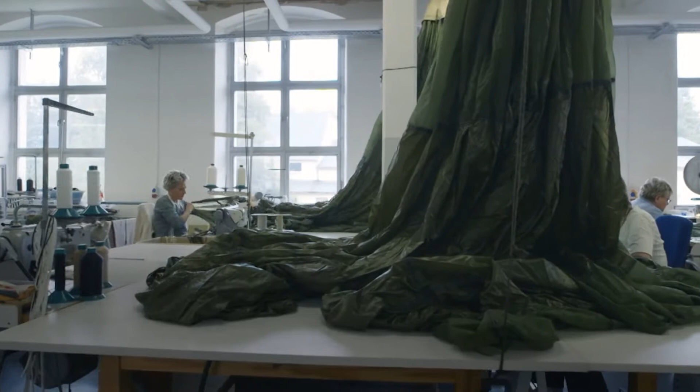Stitching these sheets of lightweight material together can create an air-resistant canopy that can drop a fighting force out of the sky and turn the tides of war.

When Leonardo da Vinci first conceived of the parachute in 1483, he may not have realized the impact it would have on warfare.

5 centuries later, the Allies launched Operation Varsity. On a single day in March 1945, 16,000 British and American infantry were dropped onto the eastern banks of the Rhine, securing strategic towns and bridges and playing a pivotal role in the Allied victory.

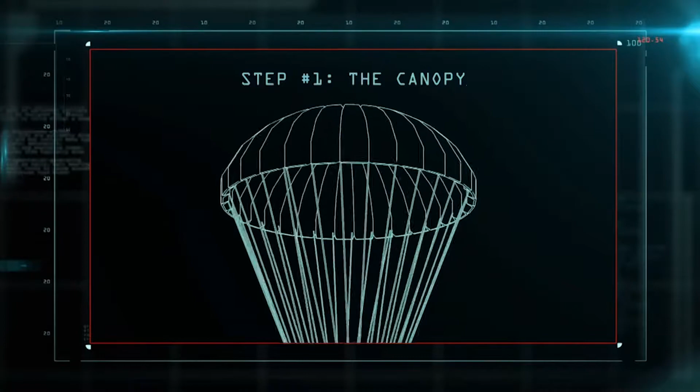The RS-2000 military parachute breaks down to the chute pack, the harness, and the canopy. It takes 90 meters of tear-resistant material to create the parachute canopy.

The idea of a parachute is simple. A canopy traps a large volume of air, creating enough resistance to dramatically reduce your terminal velocity, so you can jump out of a plane and land softly on the ground.

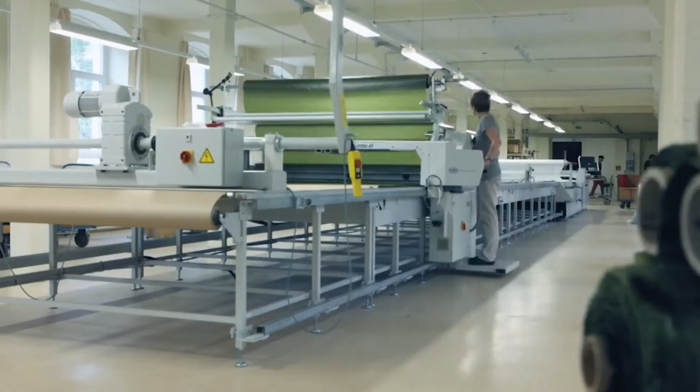But the design of a parachute is actually quite complex. The RS-2000 is made of 2 types of nylon, airtight and porous, which lets some of the air through. Hundreds of individual panels of both fabrics are laid out, measured, and machine cut on a diagonal.

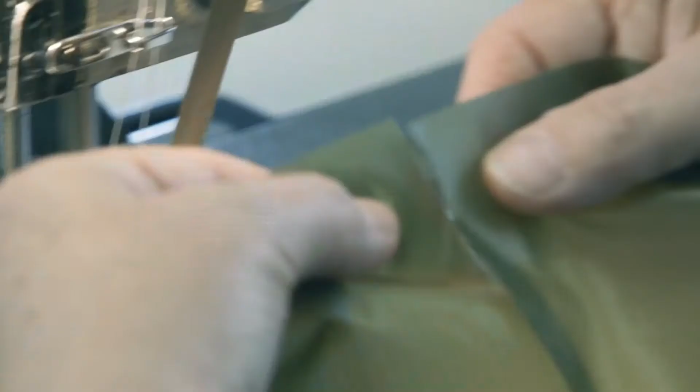This prevents any rips or holes that might occur from spreading while in use. The panels are sewn together into 7-meter wedges. The combination of airtight and porous panels help to soften the tug of the canopy opening and stabilize it during descent.

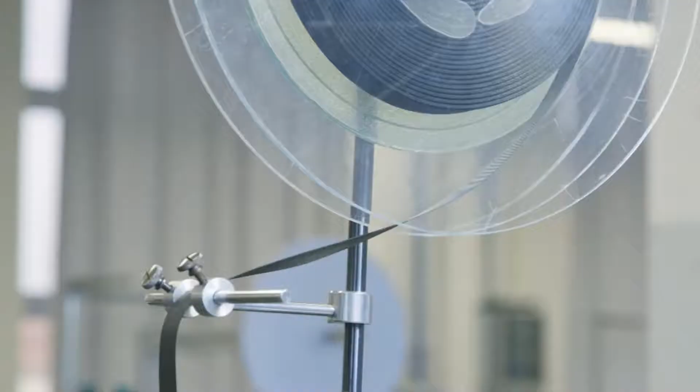Nylon tape is used to ensure the seams are tight. A rip in the air could prove fatal.

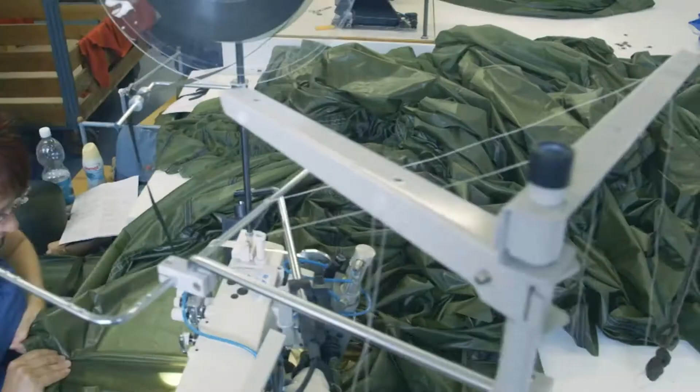Then they are laid across a light table. Every seam is meticulously checked to make sure they overlap perfectly and will hold under pressure. The wedges are sewn together and the seams are checked again.

It takes 30 of them to create the parachute canopy. A circular vent is left open at the top of the parachute.

This vent prevents the canopy from opening too fast and too hard and jerking on the harness with a painful jolt.

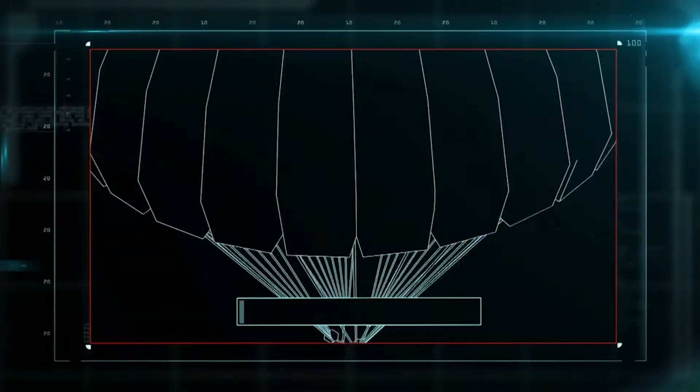The suspension lines are what connect the canopy to the jumper's harness. Each parachute requires 30 lines, which are cut into 9-meter lengths and pinned into place.

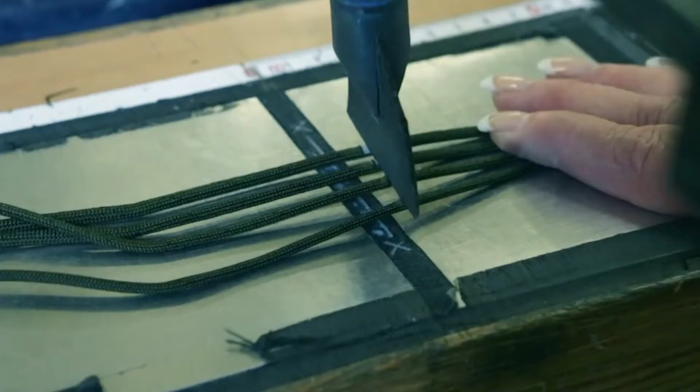Then, they're sewn into the parachute's nylon seams.

Once the parachute is complete, it's blown open with compressed air. Every seam and fitting is inspected before the canopy is folded up and put inside the chute pack for deployment.

The harness is what suspends the jumper from the canopy. It's made from very strong nylon strapping that is measured and cut with a heat knife to prevent the ends from fraying.

The strapping is secured together with a series of buckles and clips to make an adjustable harness that loops around the shoulders and legs.

On an airborne mission, paratroopers typically jump from low altitudes to minimize exposure to enemy gunfire. For safety and simplicity, the chute opens automatically moments after the jumper leaves the plane.

A 4.5-meter yellow static line runs from the cable on the plane to the jumper's chute pack. When he drops past 4.5 meters, the static line opens the pack and frees the canopy.

Next time this chute sees daylight, it could be a kilometer above the ground, and every paratrooper who steps out of a plane is taking a leap of faith that his chute is going to let him down easy.

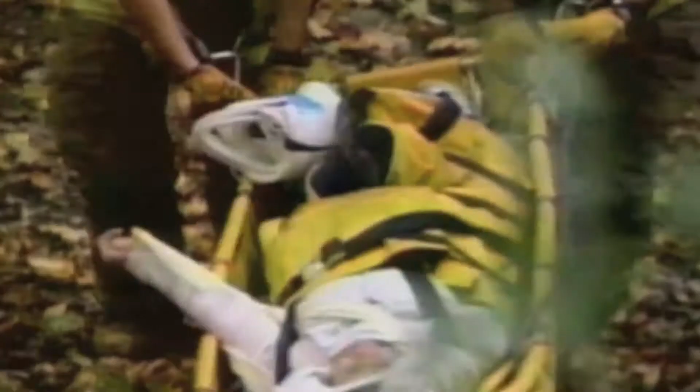Coming up on Battle Factory, a stretcher that suspends the victim in comfort and security, and a medal to honor those who gave everything in service of their country.

These simple springs aren't just designed for a pleasant ride. The Yellow Jacket basket's unique shock-absorbing suspension will protect a victim who's already in trouble from further injury.

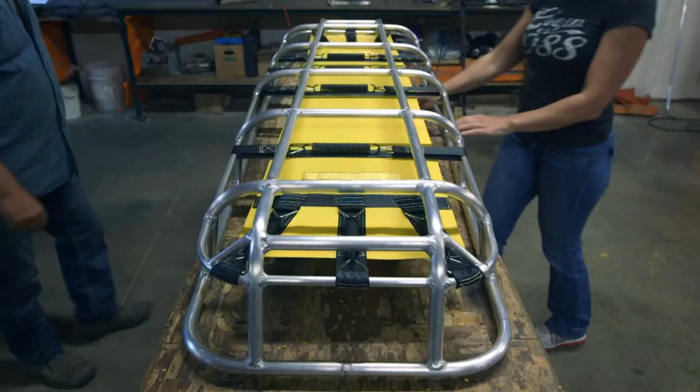In search and rescue, getting the victim swiftly and safely to medical attention is critical. But sometimes the stretcher, which consists of 2 poles and a piece of canvas, does more harm than good.

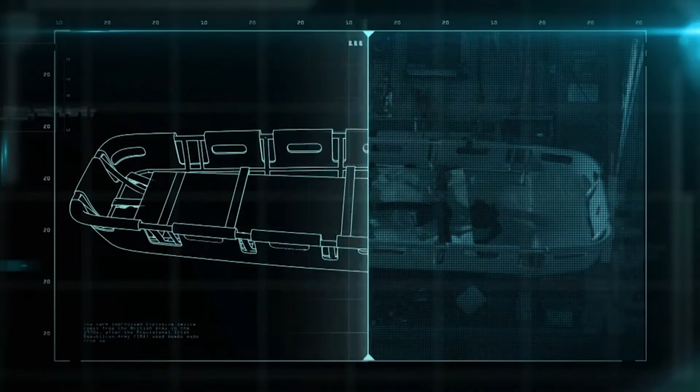Now, the Yellow Jacket is the paramedics' answer to an age-old problem. The stretcher breaks down into the shell, the springs of the insert, and the frame.

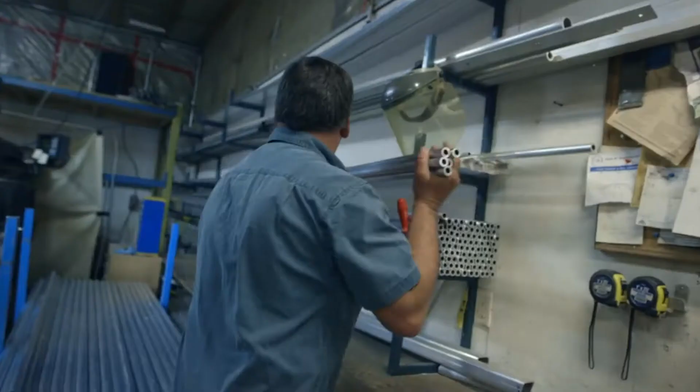The first step in building the frame is to measure out lightweight aluminum tubes. It takes 41 precision-cut pieces to construct the stretcher frame.

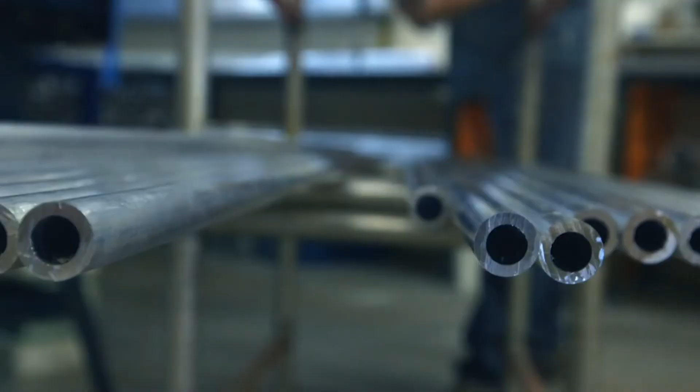Each piece is bent into shape on a digital pipe bender. Every angle is programmed into the press so that every piece fits together.

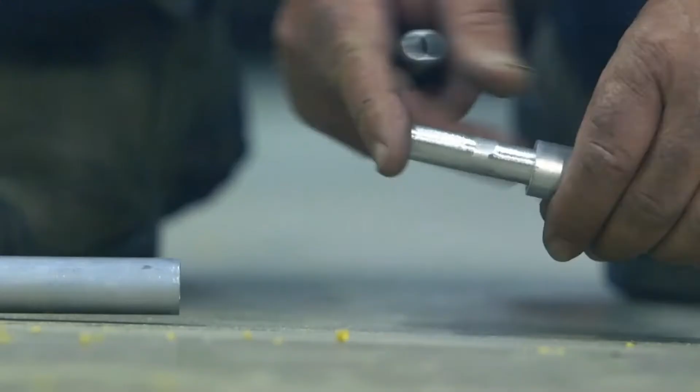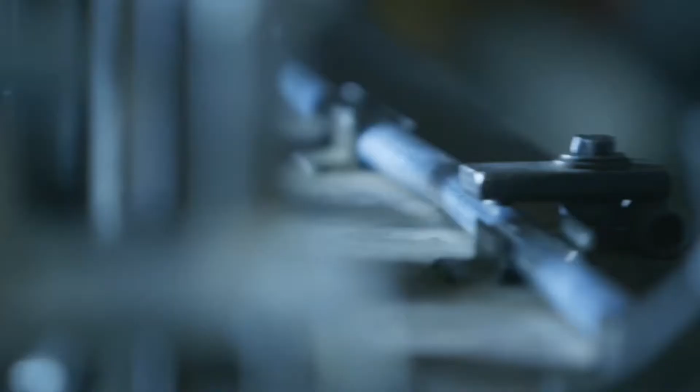Then, the 2 largest rods are hammered together to make up the outside edge. Next, it's placed on a jig, an adjustable device that locks all the pieces in place so they don't budge while being welded.

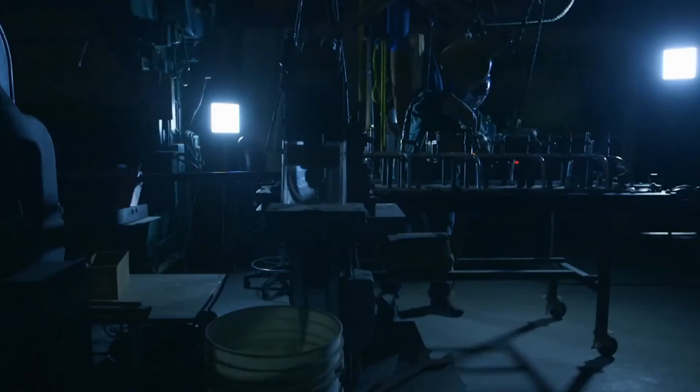Once everything is locked down, the frame is welded together.

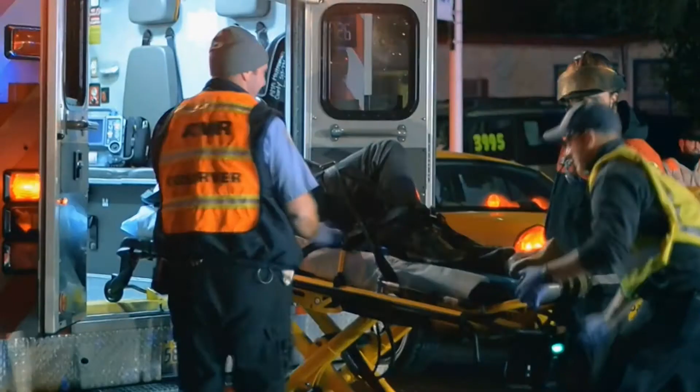The yellow basket was inspired by a rescue gone wrong. A construction worker had fallen into a deep pit and broken his leg. Firefighter Ian Bassendale was among the first responders to haul the victim out. They eased him into a conventional stretcher and strapped him in with ropes. On the way up, the victim slipped, causing a simple fracture to become a painful compound fracture. Bassendale vowed to build a stretcher that would keep a patient secure and safe, no matter how steep the rescue.

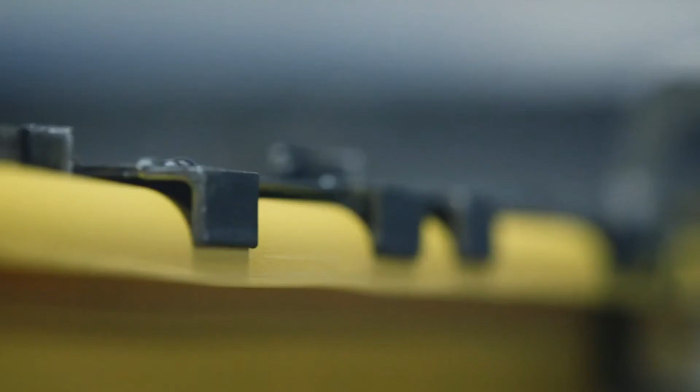The shell is a lightweight innovation that keeps the patient secure at any angle. The super tough plastic can withstand extreme cold and heat and can take a beating being dragged over rocks and snow. Holes are cut into the pre-made shell so that it'll fit snugly onto the frame.

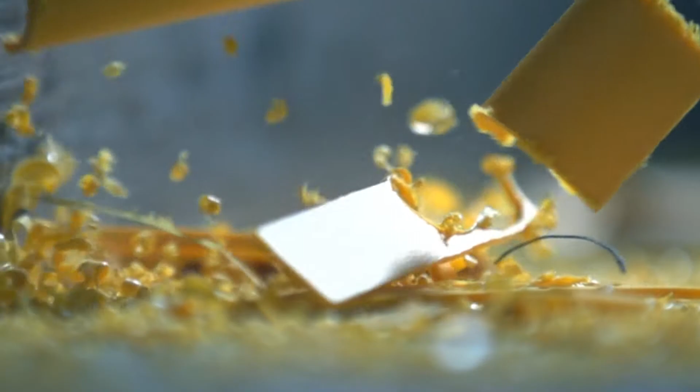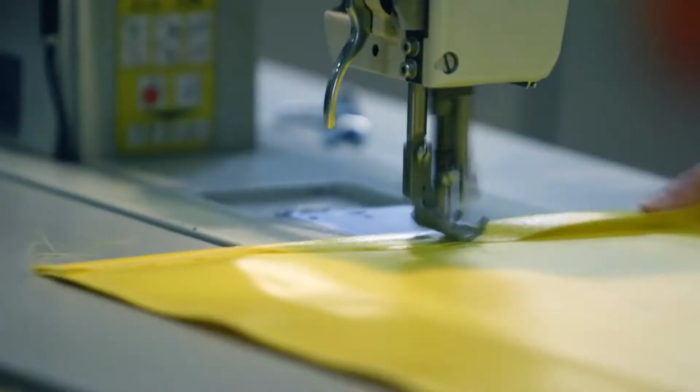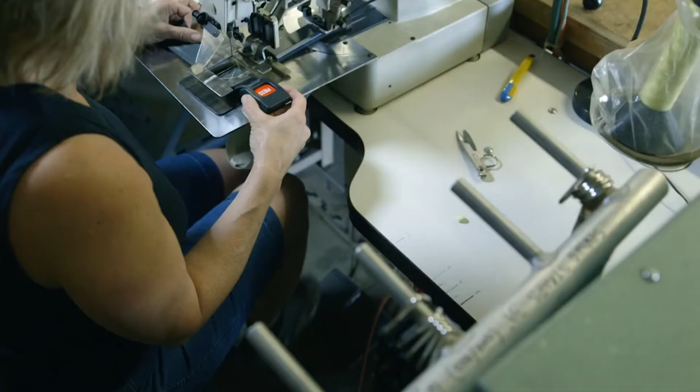The stretcher bed is cut from extremely durable nylon reinforced vinyl. The pieces are stitched together using tough nylon thread. The innovative belt system is designed so the victim can be transported securely at any angle. Each of the belts is tested to 5,000 pounds, so once you're buckled in, you're not going anywhere.

Before the yellow basket, it took 45 minutes of lashing with rope to prep a victim for an aerial rescue. Now it takes just minutes to secure the passenger for an airlift.

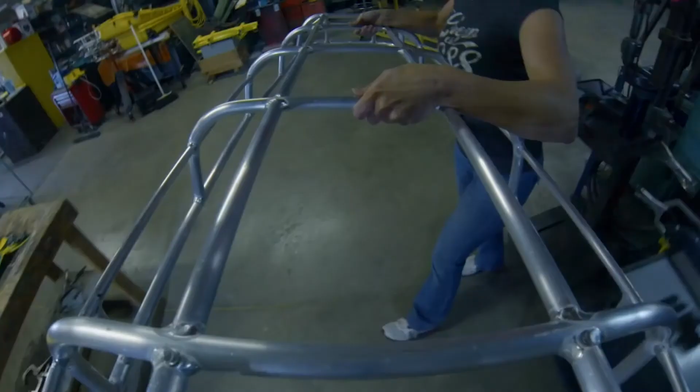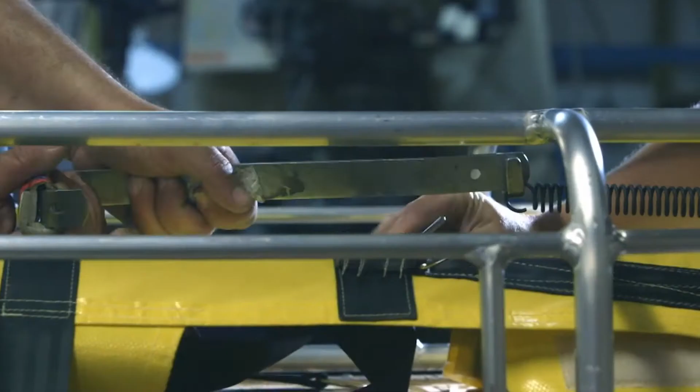The spring system is what gives the stretcher its unique shock-absorbing capacity, and the difference between a safe ride and a potentially damaging one. 10 individual springs secure the bed to the aluminum frame. The springs are distributed around the frame to maximize shock absorption, doubling up at the head and hip area, where the patient is heaviest and most likely to be hurt. The stretcher can take the weight and take the hit.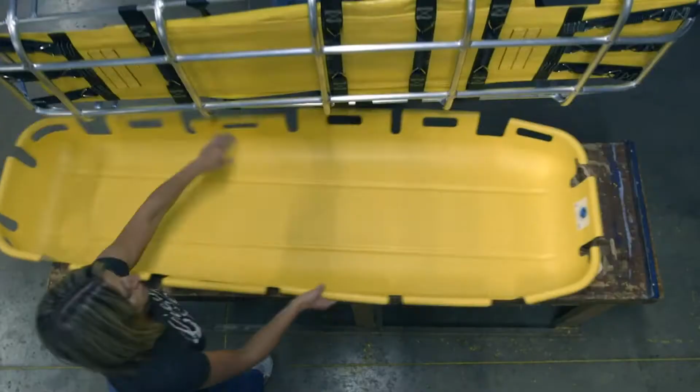Finally, the stretcher is then lowered onto the shell and clipped into place. The Yellow Jacket stretcher has revolutionized the rescue process for over 5,000 first response agencies and military organizations around the world, ensuring that the trip to safety is a success.

Coming up on Battle Factory: awarding the highest honor for the greatest loss. And the business end of the Stryker armored vehicle.

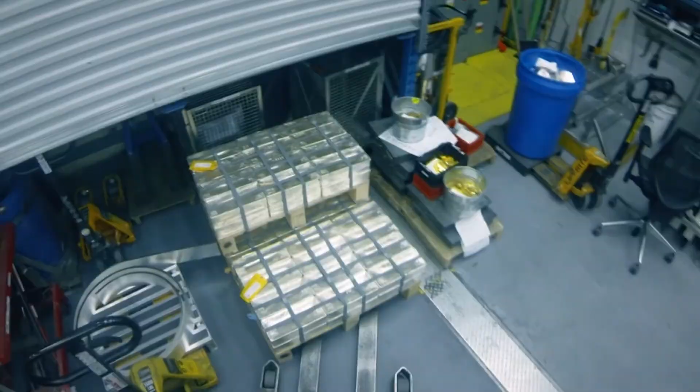These 1,000-ounce bars of pure silver bullion can be worth tens of thousands of dollars apiece. So one pallet alone can be worth over $1 million.

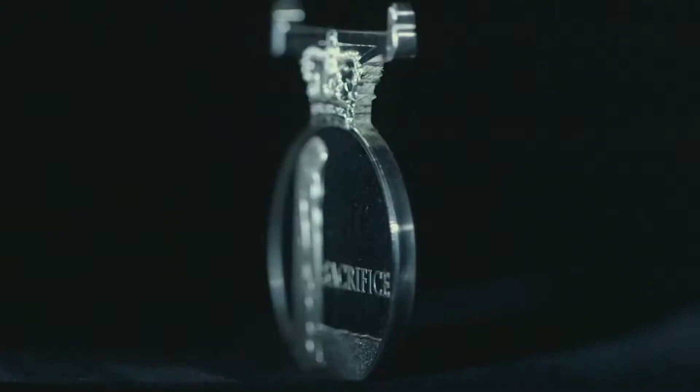But some of Canada's bravest have paid a much higher price. The sacrifice medal was created in 2008, and today it's been awarded to 780 Canadians wounded or killed in the service of their country.

In Afghanistan in 2007, a deadly IED blast wounded a young soldier named Simon Mailloux. As a result, his left leg had to be amputated. Two years later, Simon was awarded the Sacrifice Medal and became the first Canadian amputee to be returned to active duty. He flew out the very same night as his medal ceremony.

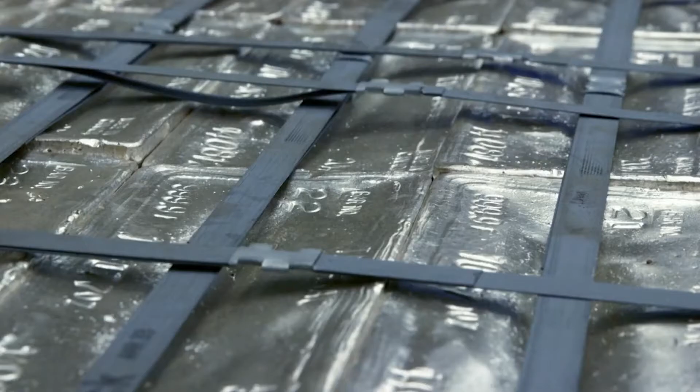The medal is manufactured at the Royal Canadian Mint in Canada's capital city, Ottawa. Over $1 billion worth of precious metal is stockpiled here, so armed guards and closed-circuit cameras track every movement inside the mint.

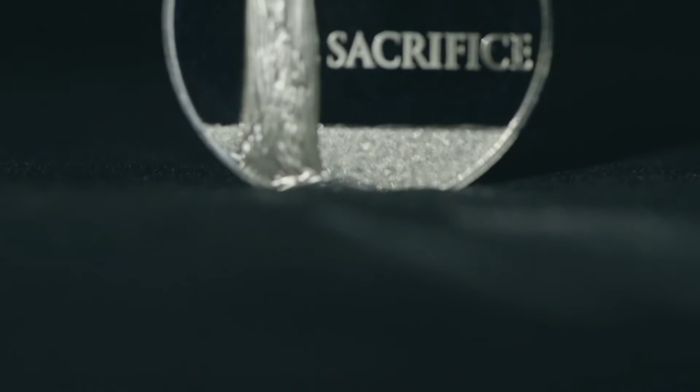From the medal design to engraving the die, creating the sacrifice medal requires skill and care. The sacrifice medal breaks down into the ribbon, the suspension, and the medal.

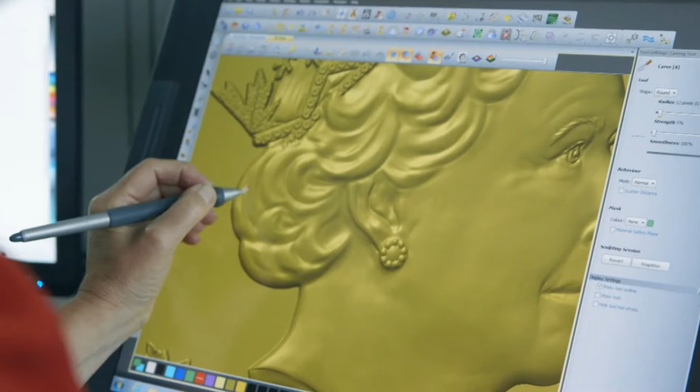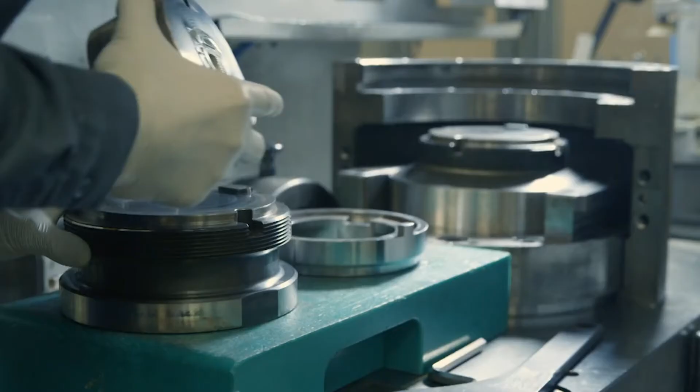Using a design approved by the Queen in 2008, the front side of the 3.6-centimeter disc is engraved with the image of Queen Elizabeth II, the head of state and the armed forces. On the reverse is the statue Canada from the Vimy Ridge Memorial, the symbolic mother of a nation grieving for her fallen. The digital image is transferred onto a steel die and used to strike the sacrifice medal.

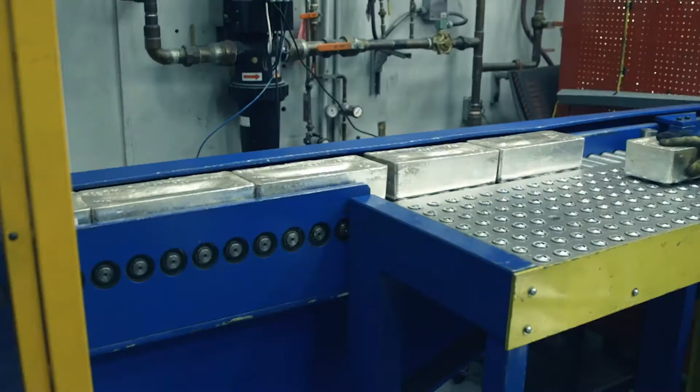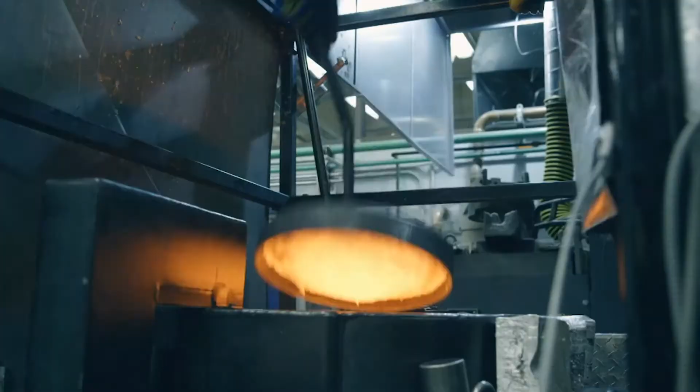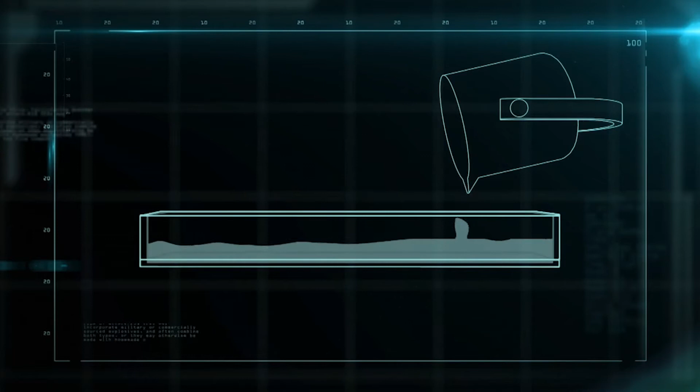The bars of fine silver that will make up the medal are lined up on a conveyor belt and carried into a machine that cuts them into thirds so they'll fit into the casting furnace. Then they're hand-fed into the furnace, which reaches 1250 degrees Celsius, in order to turn the precious metal to molten silver. The silver comes out in water-cooled slabs, about 13 centimeters wide and various thicknesses.

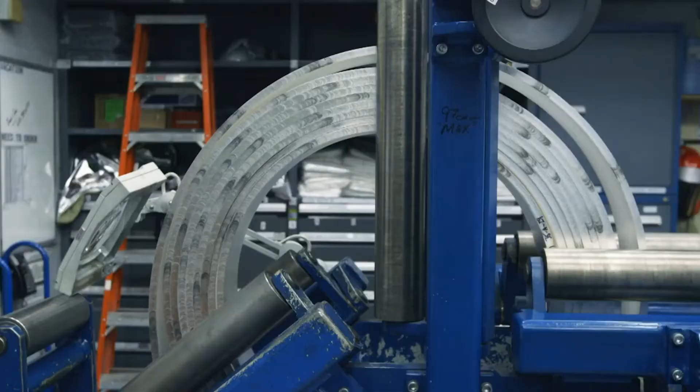Then, the shiny strip is wound into 450-kilogram coils, about 2.4 meters long. In the rolling room, the coil is unspooled and rocked back and forth to thin out the slab to a higher gauge.

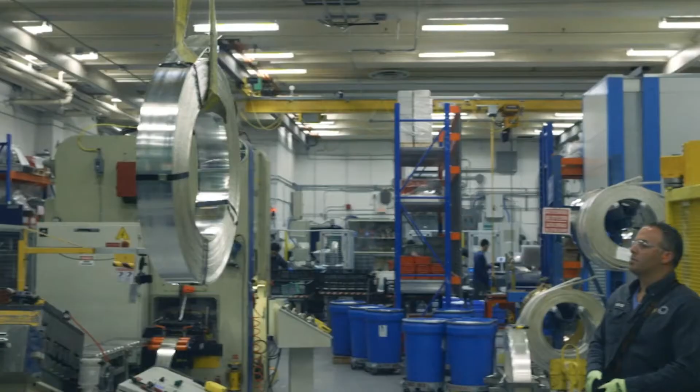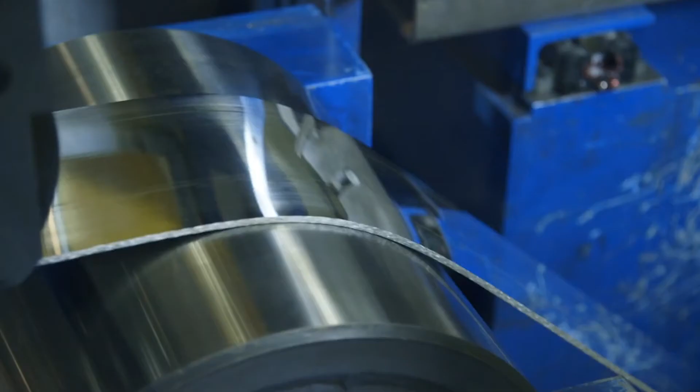To keep the silver soft, it's reheated in another furnace at 500 degrees. It's put back on the roller, and finally the silver strip is thin enough for the basic shape of the medal to be punched out.

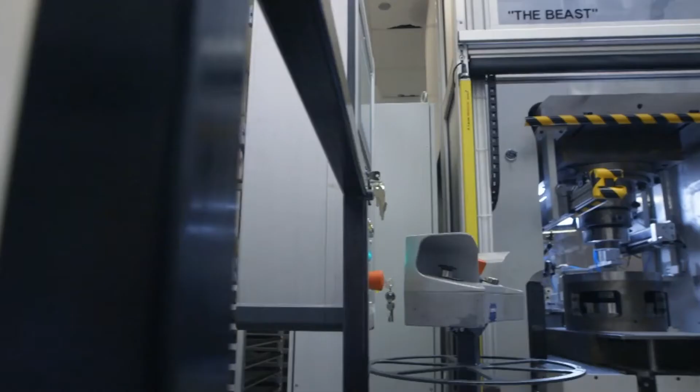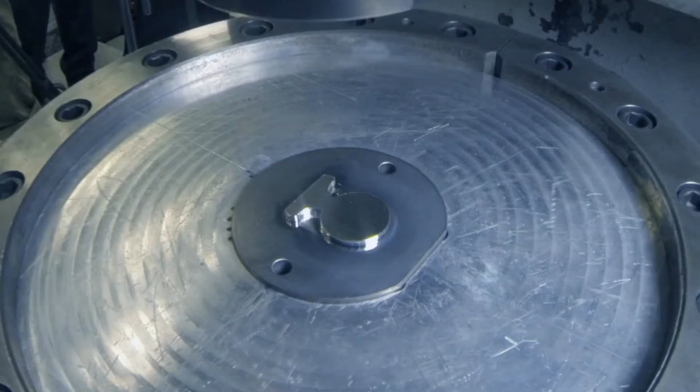A blank is prepped for striking. It's blown clean and placed in the press. During the striking process, the die strikes the design onto both sides of the silver disc with several hundred tons of pressure. Once the metal is struck, it goes into a mill where the edges are shaved smooth.

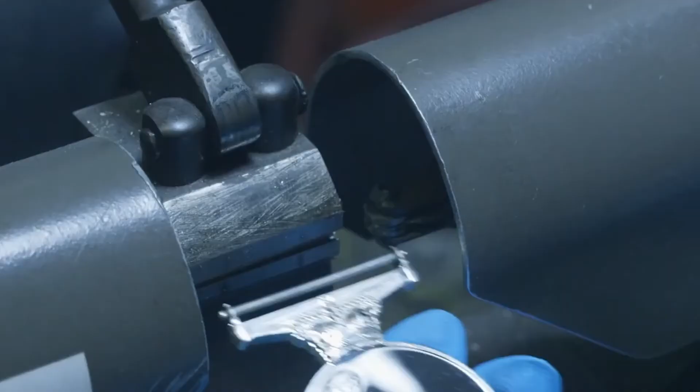A hole is drilled in the bracket, and the suspension, which will hold the ribbon, is attached. Before being awarded, the medal is suspended on a multicolored ribbon. The red stripe is symbolic of spilt blood, the black symbolizes loss, and the white stripe represents hope and peace.

For soldier Simon Mailloux, going back to the battlefield didn't just take courage. He had to prove he'd overcome his disability, marching 14 kilometers on his artificial limb, digging a foot-deep trench, and carrying a fellow officer for 100 meters.

Soldiers like Mailloux, those who made it back, those who didn't, are emblematic of the bravery, the service, and the sacrifice that merit the Sacrifice Medal.

Coming up on Battle Factory: 1 cannon, 4 kinds of ammo, and a round every 6 seconds.

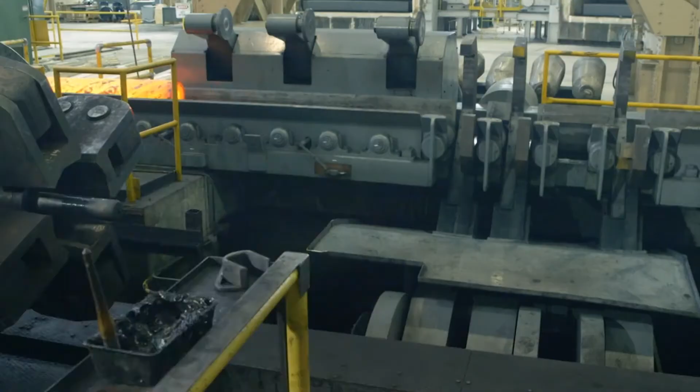This tube of forged steel will be hammered into one of the most powerful and famous cannons in modern warfare. Today, the M68 105mm cannon sits on the turret of a Stryker armored vehicle, but it's a cannon with a long and storied history.

During the Gulf War, the 105 was mounted on the turret of a Patton M60 battle tank. In February 1991, the 1st Marine Division spearheaded the liberation of Kuwait. It looked like the advance would be uncontested until the Iraqis attempted a daring counterattack. The Americans, in Patton M60 tanks armed with 105mm cannons, were forced to go head-to-head against hundreds of Saddam's tanks and armored vehicles.

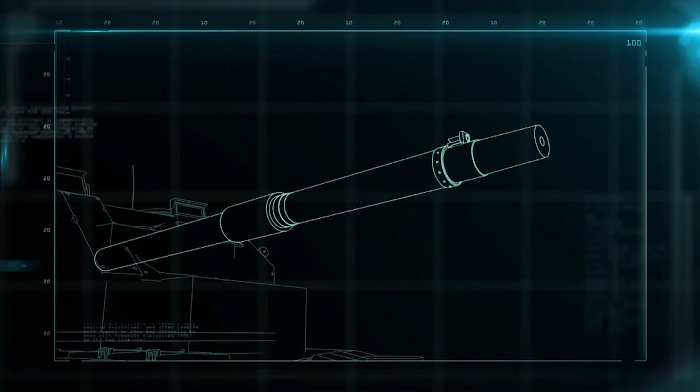Over 20 years later, this cannon is still a force to be reckoned with. A battle tank is only as effective as its gun, and for the Stryker vehicle, that's the M68 105mm cannon.

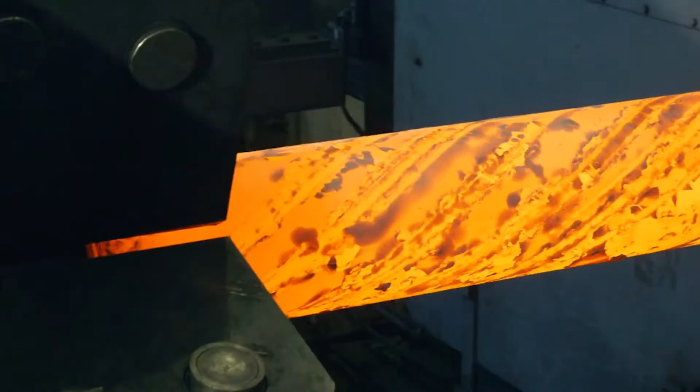First, a block of gun steel is heated in a furnace for an hour at 2,000 degrees to soften the metal. Then, a jaw-like mechanism called a chuck grabs the tube and pushes it into the rotary forge. In the forge, 4 synchronized hammers strike the tube with 200 tons of force. As the hammers pound at its surface, the tube rotates. This process lengthens and shapes the red-hot metal as if it were clay.

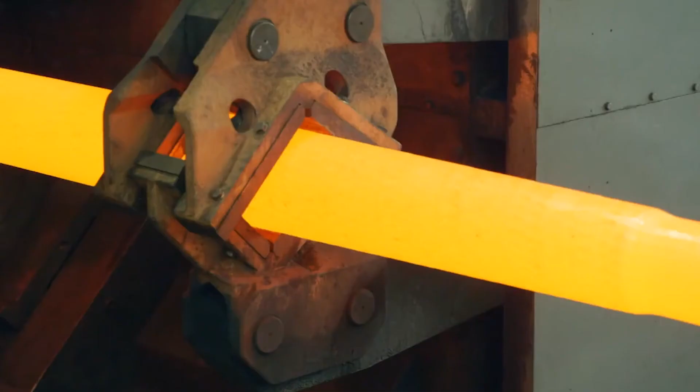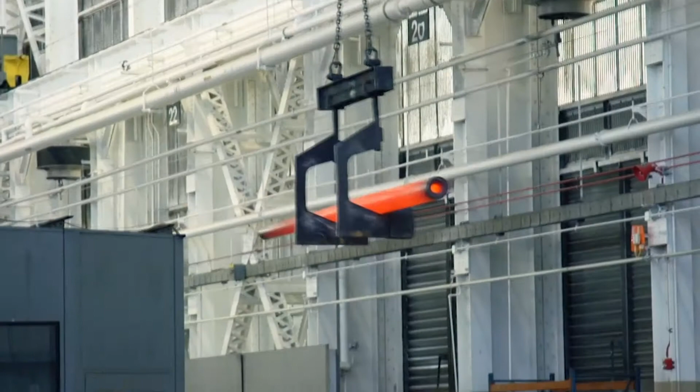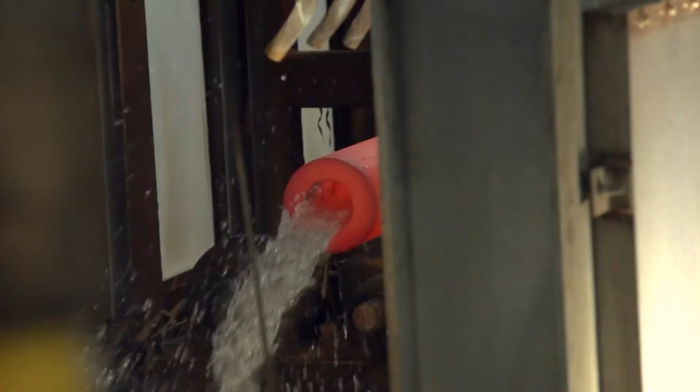Coming out of the forge, the cannon is stretched in length from 3.3 meters to 6.8 meters. The cannon is lifted onto cooling racks to cool for 24 hours. Then the cannon is reheated in another oven with open flame for about an hour and then cooled with water. This process hardens the steel.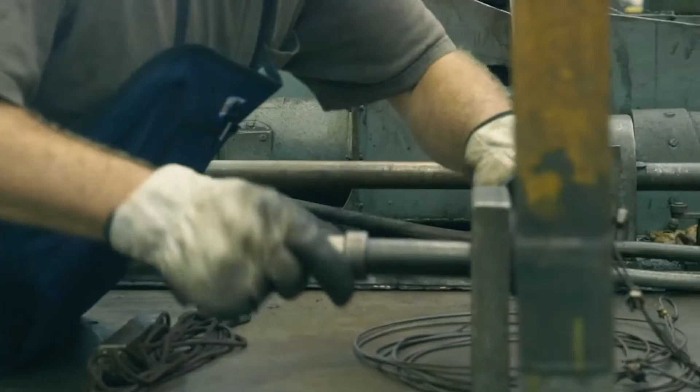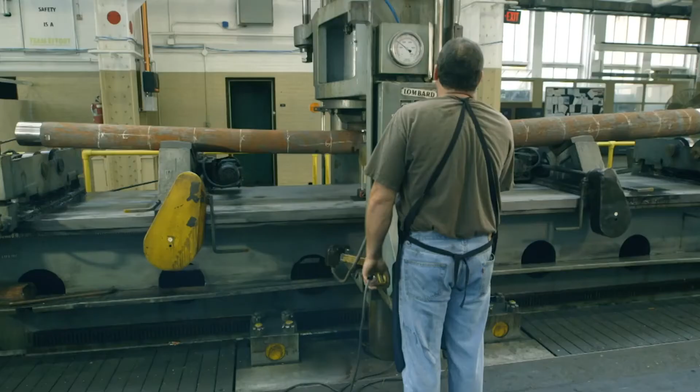After all this heating and cooling, the cannon develops bends. A shell launched from a warped cannon will veer off its target and might even misfire. To straighten the cannon, it's hoisted onto a horizontal press. The tube revolves while a probe measures it, and the operator marks any warps. Next, 1,000 tons of pressure is applied to the areas that are warped, and the cannon is made perfectly straight.

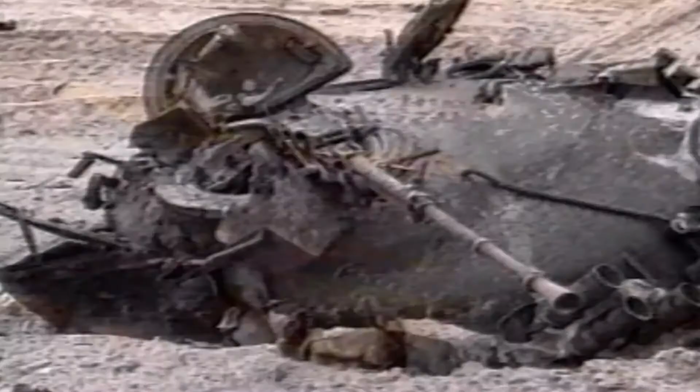During the Gulf War liberation of Kuwait, Saddam's tank units launched a fierce attack against the U.S. troops. They responded with force. The Patton M60 was a superior tank, and the 105mm cannon meant the Americans could get shots off from 2 kilometers away, outgunning the Russian-supplied T-72s. Hours later, the Iraqi arsenal lay in ruins, while the Americans didn't suffer a single loss. This marked the end of Saddam's occupation of Kuwait and the beginning of its liberation.

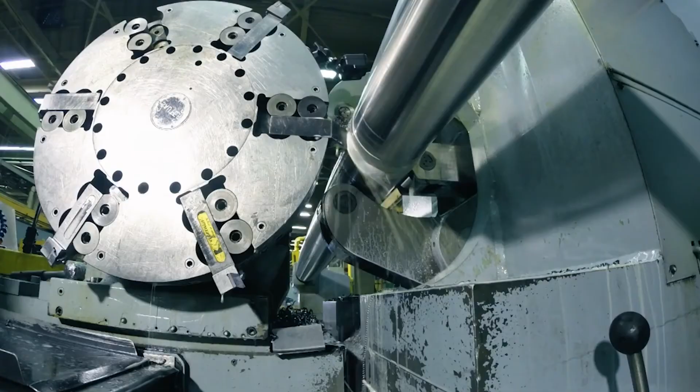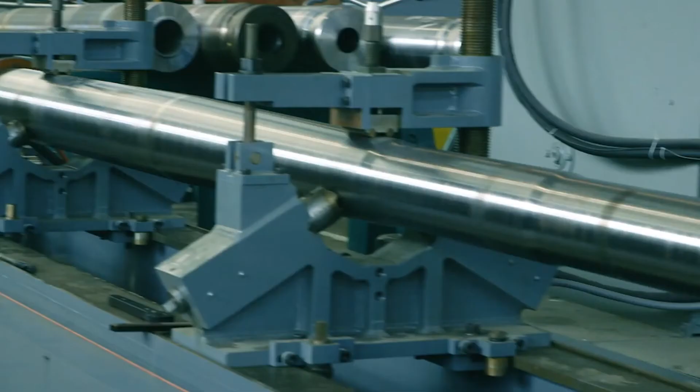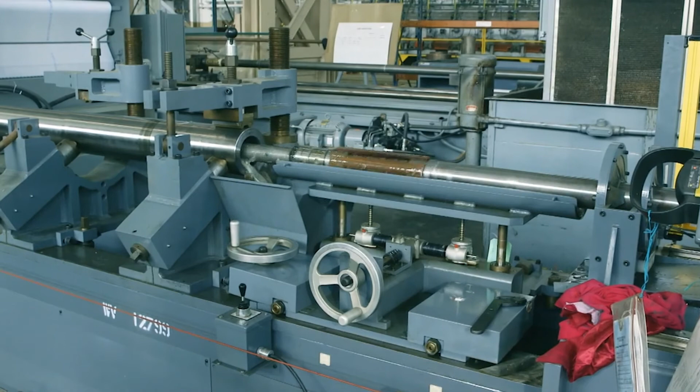First, the cannon spends 6 hours rotating on a lathe. It machines off the rough exterior metal called bark, leaving behind a shiny, clean finish. Next, a machine drills through the length of it to make the inside opening of the barrel wider. Then, it is honed by rotating grinding stones inside the cavity to smooth it out and bring the barrel close to size. Synthetic oil reduces the extreme heat and friction. When it's finished, the diameter will be exactly 105 millimeters, the measurement that gives this cannon its name.

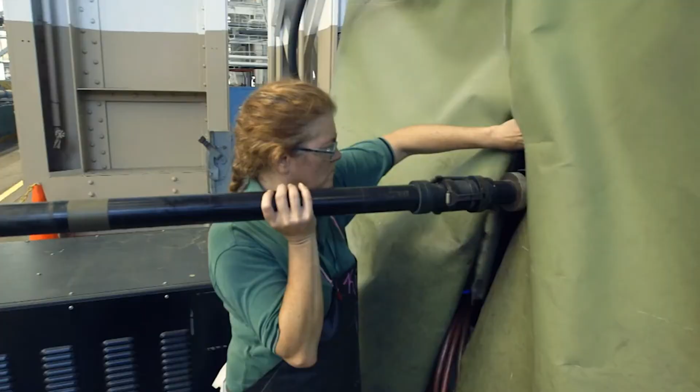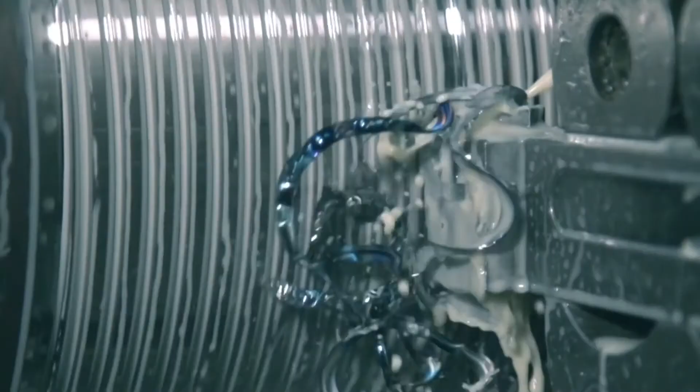Once the inside has been smoothed out, the cannon barrel is checked for cracks and imperfections. The interior is brought to spec, and the breech end of the cannon is threaded so it can be attached to the tank.

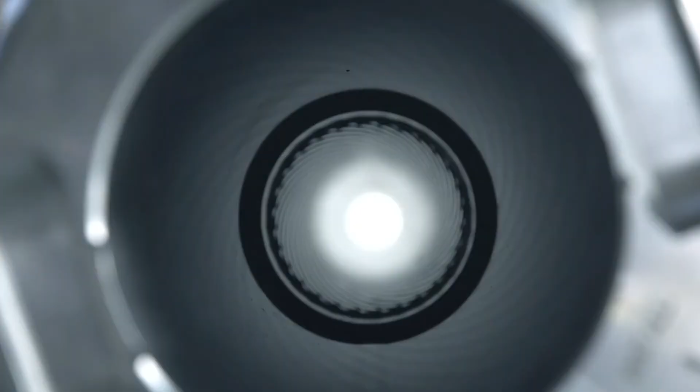Finally, the cannon is rifled. Helical grooves are carved onto the inside walls of the barrel, which causes the shell to spin when it fires. This stabilizes its trajectory and improves the aim.

By the mid-1980s, the 105mm cannon ceased to be the largest tank cannon out there when the M1 Abrams was built. But the 105 is still a force to be reckoned with. These days, it does duty on the top of a Stryker, an armored fighting vehicle. And with the 105mm cannon riding up top, it now wields the power of a battle tank.